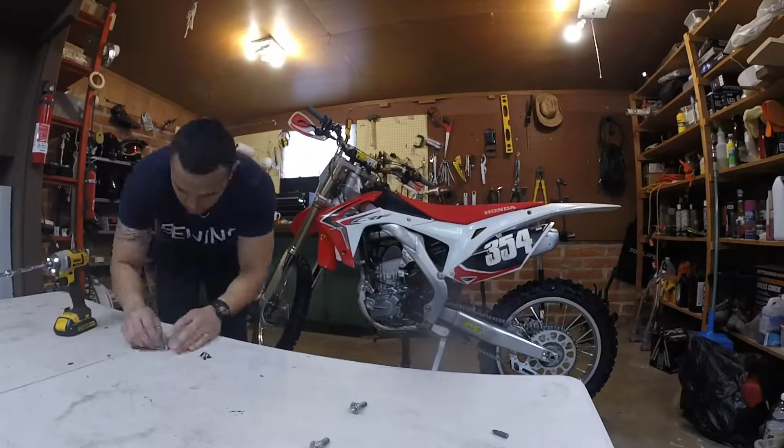Alright, in order to remove the gas tank, you have a cable here that's attached to a hook. You can just unhook it, it comes right off. And then you want to unhook your fuel line, which is this bad boy here. You just got to remove the cover. Comes right off, a little plastic cover.

And then there's a connector here that you just remove. You squeeze, and then you can pull this guy out. You just disconnect, the quick disconnect. The manual says to remove it here. I find it easier to remove there.

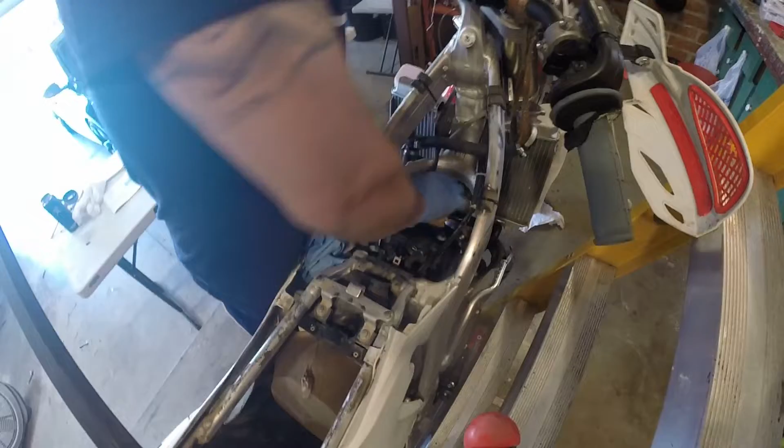And you have your clip, a little clip for the power. You remove it off the frame and then do a quick disconnect as well. So the first thing we're going to do now, we're going to get to our valves. Remove your spark plug cap. Just set it off to the side. Going to remove our breather here and pull that out.

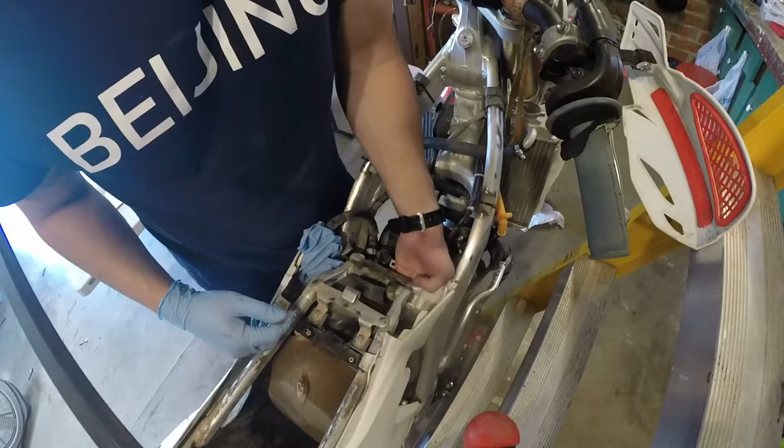There we go. Push that away, and then we'll go ahead and take off our cover screws. Pops right out. It's pretty clean in there. All these are reusable seals. Now we can see our actual head and our valves.

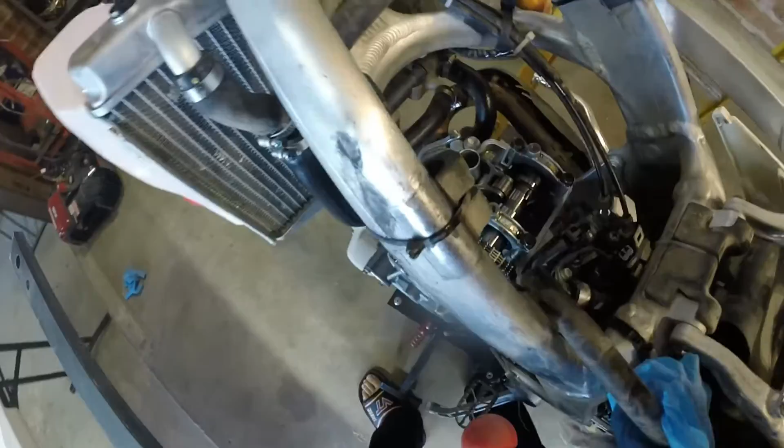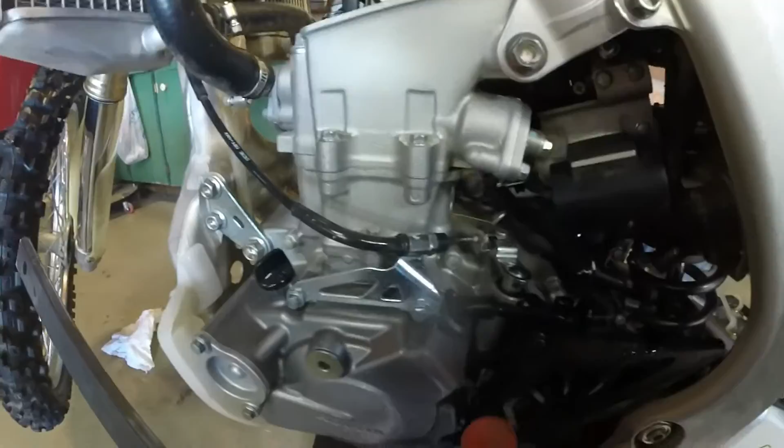You can see your exhaust valves are right here, and the distance we're going to measure is in between this rocker arm and the top of the shim. And the intake valves are underneath the cams. You can't really see them here, but we're going to measure underneath the bottom of the cam and the top

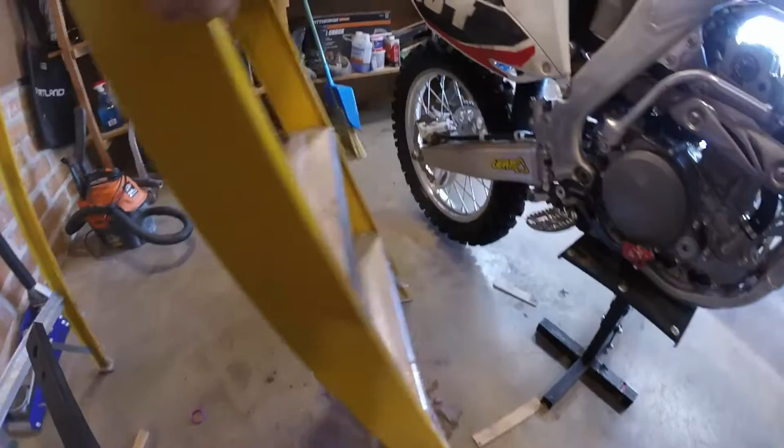of the shims. First, before we do that, we need to put the engine at top dead center, which is TDC, and there's a lot of things you can do to double check that, and we'll go ahead and walk through it. First thing we're going to do is remove our spark plug so we can easily move the piston up and down. You're going to remove this cover here, and I'll show you what's inside.

So once you remove your spark plug and this cover here, you'll see a little dot on that gear, and then you'll see a little tab sticking out of the frame here. You want that dot to line up with the tab. This is an indication that you're at TDC. You only rotate the gear clockwise. You rotate it like this. Your Allen. Make sure your tool's clean. Mine is kind of dirty.

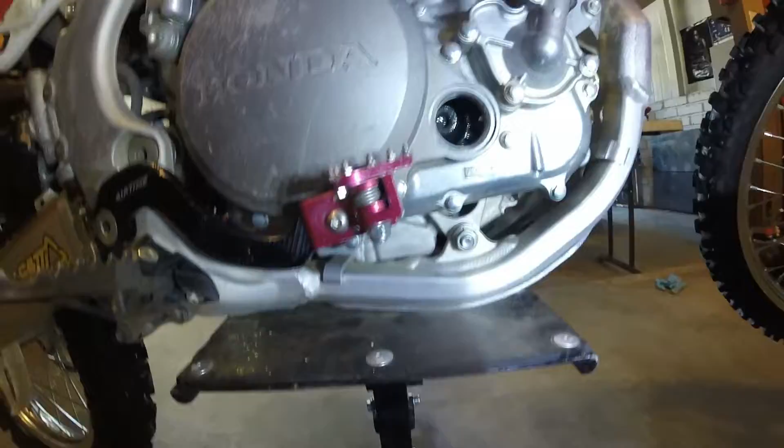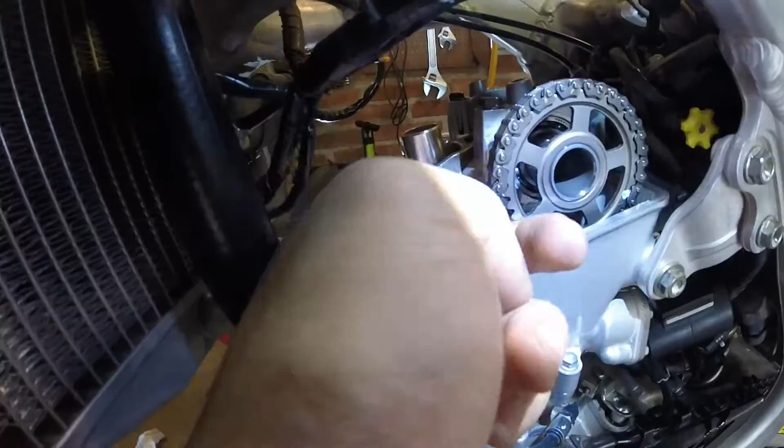And the way to determine that you're at TDC is that your exhaust rocker arms, which are these bad boys, should be loosey-goosey. You can see they move up and down, which means they are not pressing on the valve.

Another indication, you can see your timing chain and your timing gear. There's a line, a groove cut into the gear. That should be horizontal with the top of this head. That's another indication that you're at TDC.

TDC is top dead center, which means you're on your compression stroke. This is where the fuel's already in your cylinder, and your piston's coming up in compression, and all your valves are closed. So you check your valves are closed by feeling your rockers, and you look at your intake valves. You can see the cams.

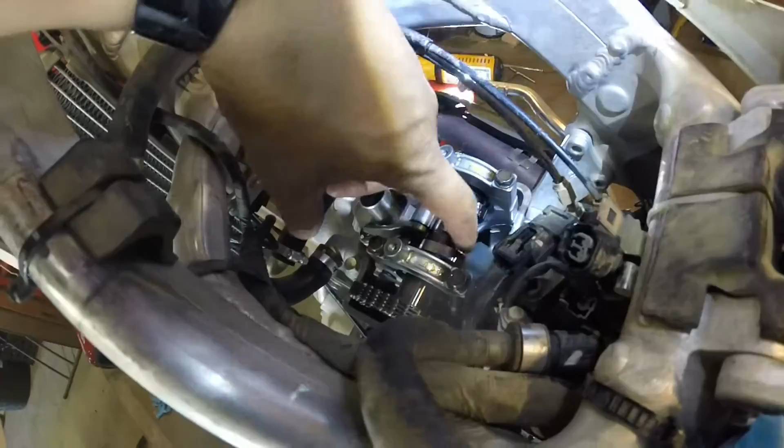These are two cams. These push down on the valves to open them for the intake stroke. You can see how the lobes are pushed up, which means they are not pressing on the valves, which is another indication you're at TDC. You can only take your valve measurement when you're at TDC, so that's why this is important.

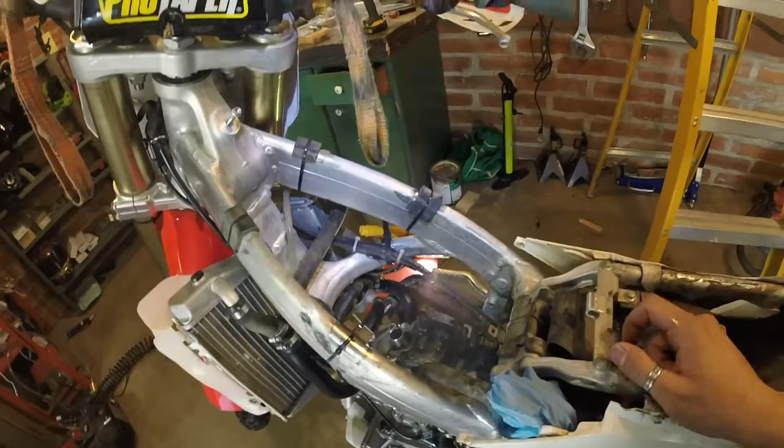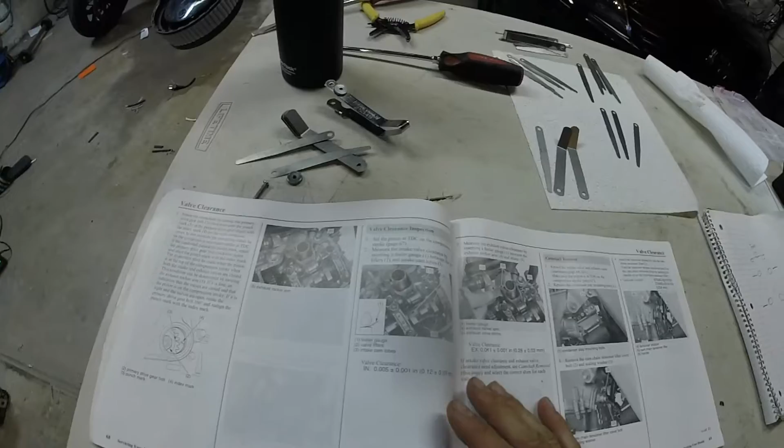Alright, now that our engine is at TDC, we'll go ahead and measure our valve clearance. We'll start with the hardest valves, which are the intake valves. The reason why they're hard is they're just kind of hard to get to. I recommend getting the angled feeler gauges. It'll help you reach inside.

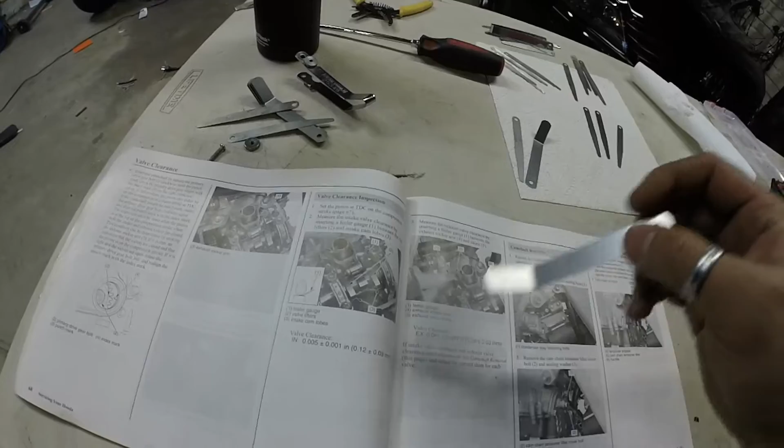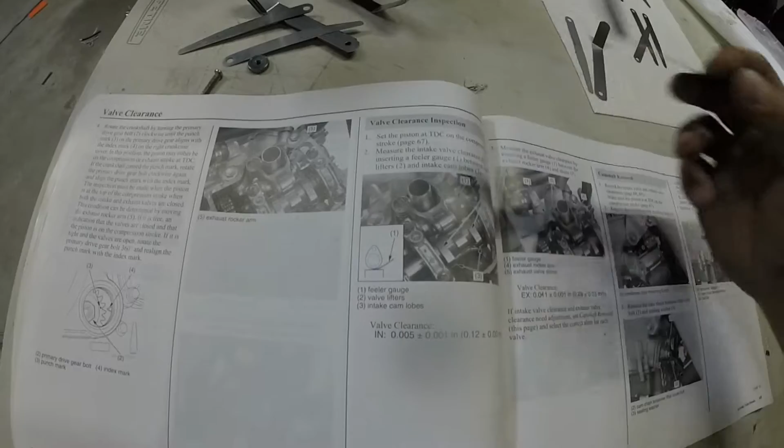You actually need to measure underneath the cam and on top of the valve lifters, also known as the shims. See a little picture here. This is your cam, the side profile. Number 1 is your feeler gauge, and this is where your shims are. There's actually a cover on this one. You measure right in between, and you can see even in the picture they show an angled one. Your tolerance on this is 0.005 inches, plus or minus 0.001.

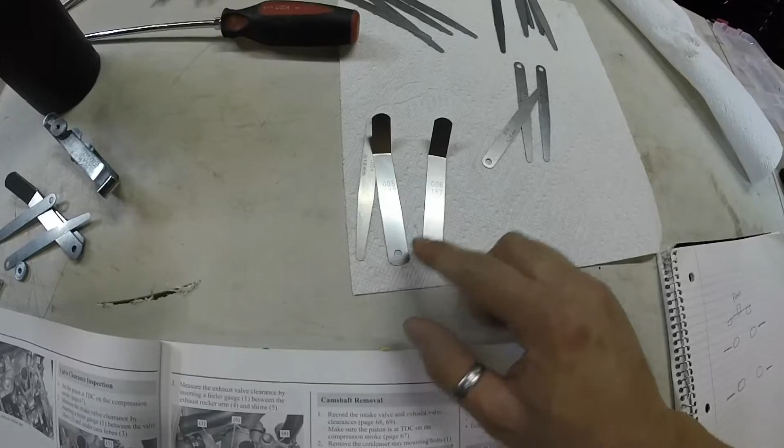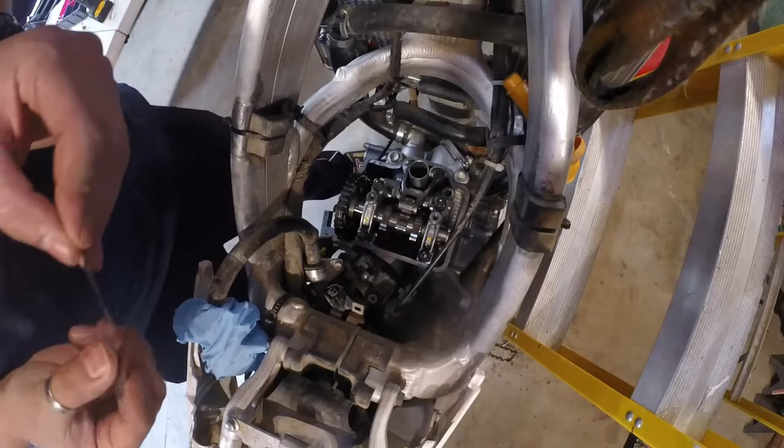So I went ahead and laid out my feeler gauges. They don't make an angled 0.004. I'm aiming for 0.005, so we'll go ahead and start with this one, and then we'll make our way around. Okay, we'll go ahead and measure our intake valves. I'm going to start with 0.005.

Go ahead, and this is our cam here. You have 2 of them. You're going to slide it underneath the cam, and then somehow on top, and it should provide a nice resistance. This one goes in pretty good.

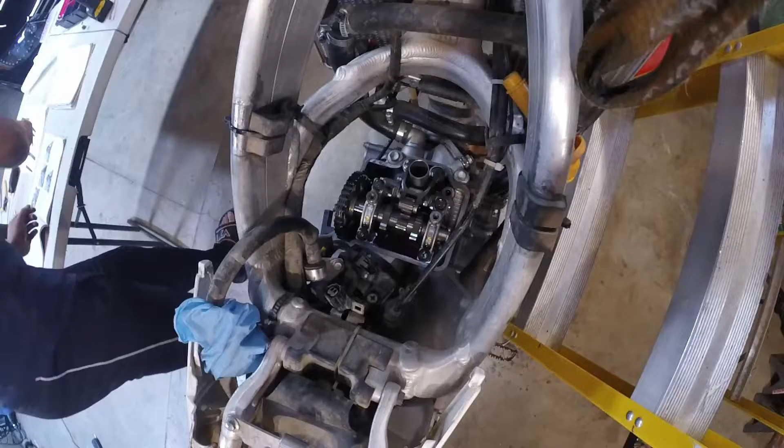Yeah, so this is 0.005, and it does fit in kind of loose, so I'm going to go up one size. 0.006 should not fit. If this is actually 0.005, 0.006 should not fit. So we'll go ahead and try that right now. Go ahead and slide in 0.006. And again, this should not fit.

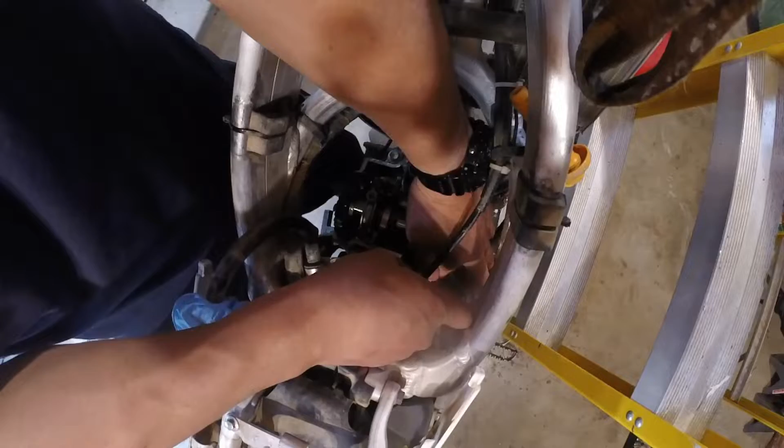Remember, you don't shove it in there. It's just kind of hard to get to. I'm not shoving, but this one doesn't seem to fit, which is good, which means we're in spec for this one. Let me take another measurement. You want to do this several times. Yeah, this one does not fit, so good news on that one. Yep, 0.006 does not fit on the right intake valve. I'll go ahead and write that down.

We'll go ahead and move to the left intake valve, and we're going to start with 0.005. This one's giving me some struggle, so I'm going to try it on this side. Whichever side you think is best. Again, it's pretty difficult to reach in here, but they should slide in pretty easily. This one actually is having trouble sliding in. Like I said, it's slight bit of resistance. This one is not going in. This is 0.005. I'm going to move down to 0.004.

Make sure you wipe your feeler gauges. I don't have an angled feeler gauge here, so you've got to make sure you're inserting it correctly or you get the wrong reading. This seems to slide in pretty good. Remember, 0.004 is still within spec. Slide it in there. You can see it on the other side. Got all these things in the way. But you want to get it in there straight and then move it in and out and feel a tiny bit of resistance. That feels really good. 0.004. I'm going to call this one 0.004.

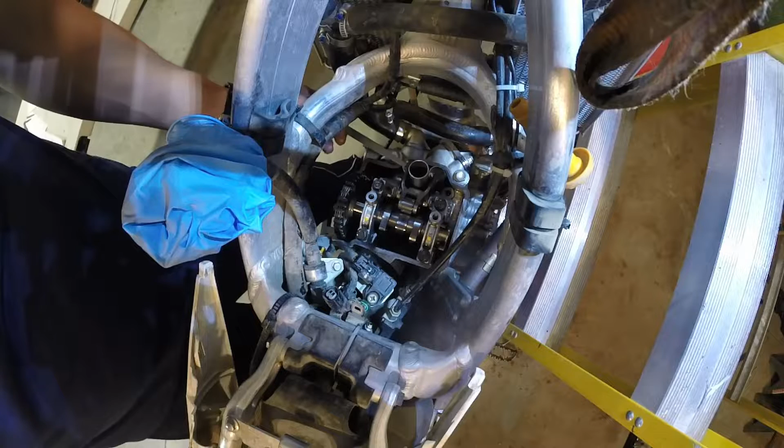Alright, now it's time to measure the exhaust valves. And the tolerance on this is 0.011 plus or minus 0.001. So this is 0.011. This is where I'm going to start. This is probably the easiest one to measure. And you can clearly see your shim and then your rocker arm, which is this guy here. You're going to measure in between that. So we'll go ahead and slide it in, and it doesn't fit. This one is super easy to measure accurately. And you see it doesn't fit. So I'm going to move down 0.001.

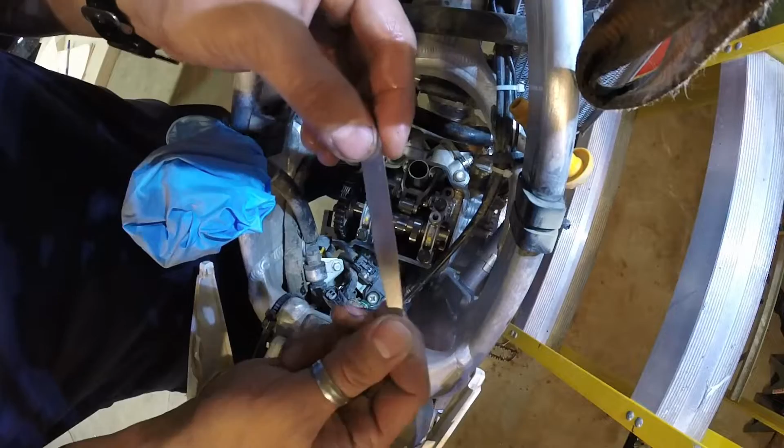Which is 0.010. Now, let's go ahead and feel it. This one does not fit. It does not fit. And this was the bottom end of our acceptable tolerance. So I'm going to go ahead and measure what we have here. This one is going to be out of spec. So I'm going to figure out what it is. So I have 0.009. We need to determine what our clearance is. And holy crap, this one doesn't fit either. Doesn't fit. So this one is pretty darn out of spec.

We're going to go down another thousandth of an inch, 0.008. It looked like it wanted to. It is getting a little too tight. We're going to have to go down another size. It should go all the way through. We're now at 0.007. And this one fits. You kind of feel the resistance. The resistance is similar to putting your feeler gauge inside of a large textbook. You should feel that slight bit of friction. You shouldn't be forcing it, and you can see how easily it slips in. It goes all the way in, and you can kind of move it.

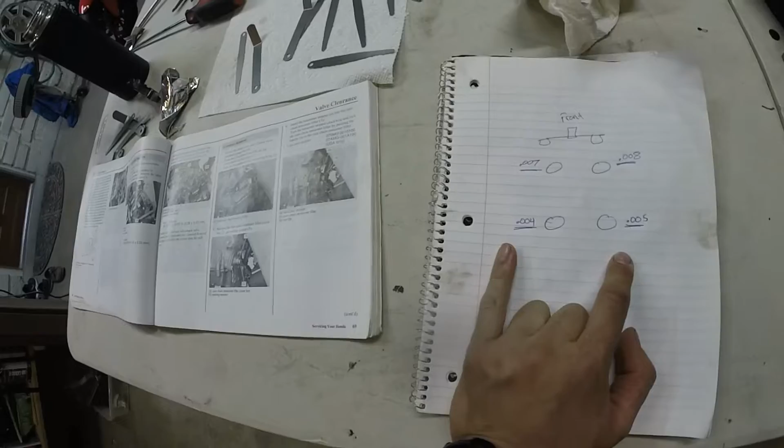Okay, so both of my exhaust shims are out of specification. I wrote it down here. 0.007, 0.008. They're supposed to be 0.011. I'm gonna have to replace those two. My intake, my left one is 0.004, which is still within spec, and my right one is exactly on the money at 0.005.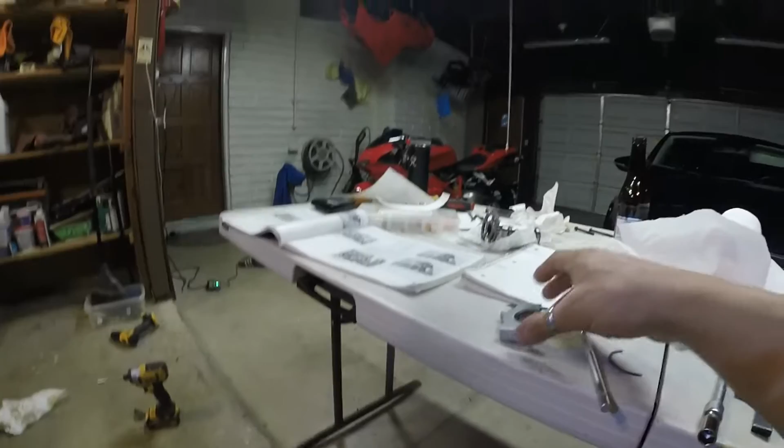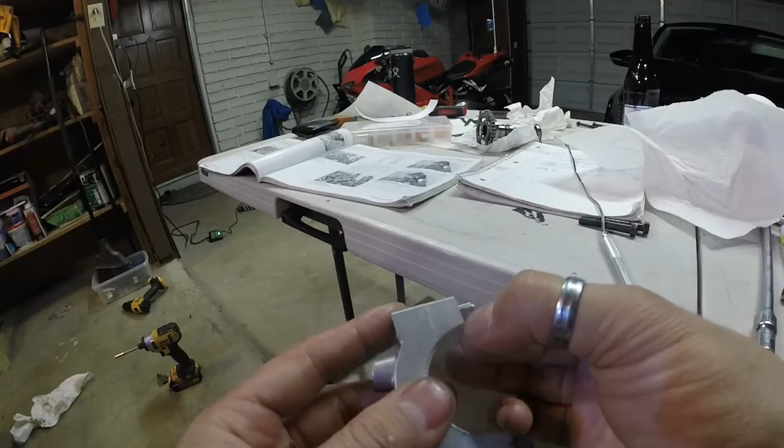Okay guys, I need you to pay attention to this. Don't make a mistake that I almost made. There is a retaining ring that sits inside of your cam journal. That's what I'm going to call it. It falls out. It looks like this. It's on both of them. Don't drop this shit. There you go. These ones are marked. It says left.

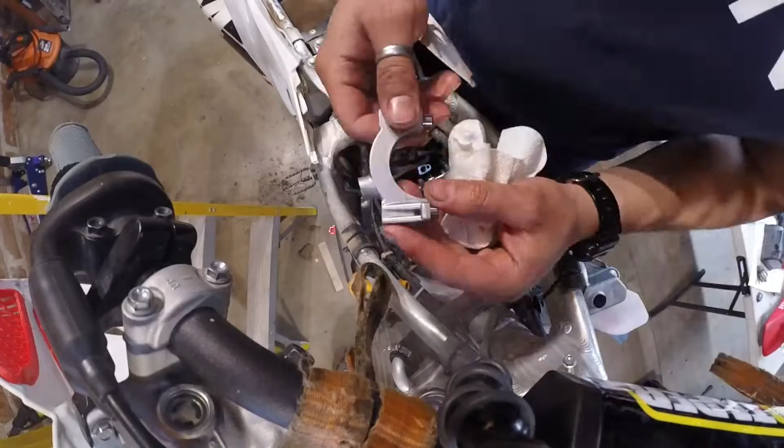There's a bearing here that we can move. You move this bearing over, this one, to the left. Hope you can see this. And then we'll go ahead and hold our cam and we'll slip our chain off by tilting our cam to the left. Bada bing, bada boom. Cam's off. You can see I'm still holding onto my chain because if I drop it, there goes your chain. So we'll go ahead and put a screwdriver here, nice and long one. Set the chain on it, it's not going anywhere.

And you can notice all the holes everywhere that go straight to the bottom end. I don't really feel like getting anything from down there, so get some shop towels and shove them in here. And hopefully, with your slippery fingers, if you do drop something, it doesn't go anywhere. This goes right here. And I forgot to do this earlier, but go ahead and cover up your spark plug hole for the same exact reason. Alright.

And you just lift your exhaust rocker up and you can get a little magnet. Pull your shim out of there. This is what the shim looks like. It's kind of like a tiny battery. I don't see any markings on it, but you need to remember, you need to mark which one you took this off. So take it off one at a time. This is my left exhaust. I need to make sure I remember it's my left exhaust. Just like the left one, we remove our right one with a magnet. Oh, there we go.

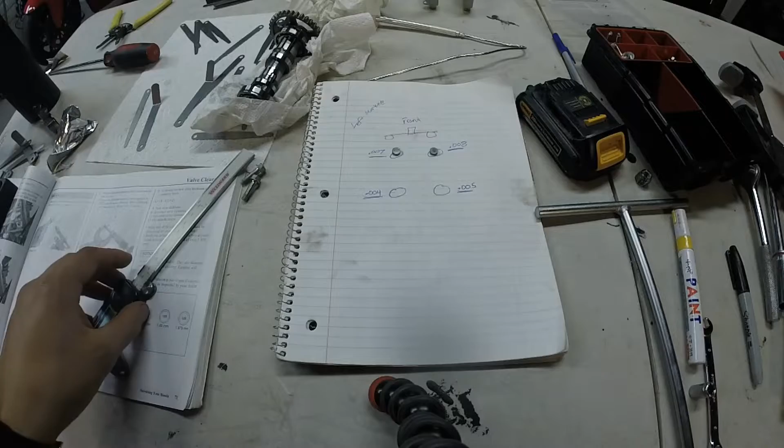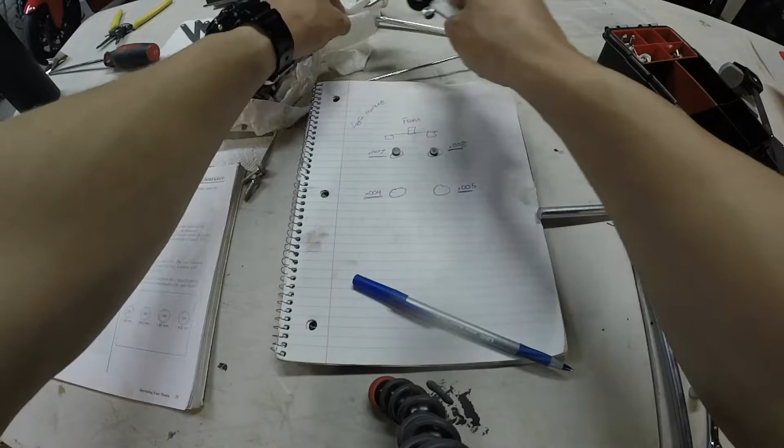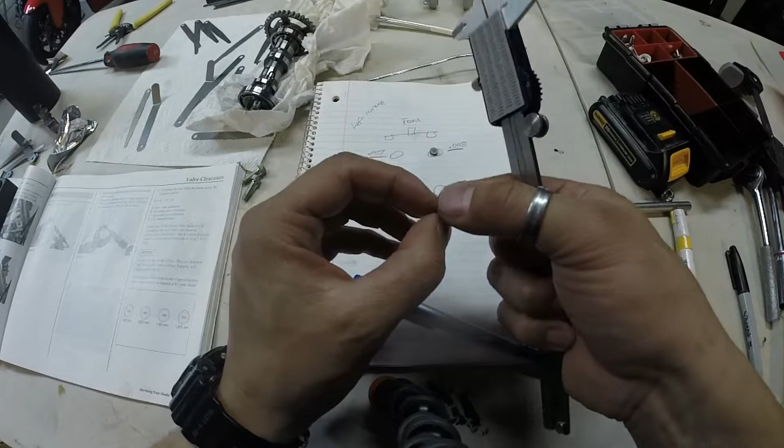Alright guys, we are at our final step. Man, this was so much easier than my Ducati. It's incredible. So we have a vernier caliper right here. This one's up to accuracy of 0.001, which is what we want. We're going to go ahead and measure the thickness of our shims that we just removed. I'm going to clean these guys off. This is my left one. Go ahead and measure this guy. Shouldn't be biting down too hard. I like to open it up and close it back down until I get the same number.

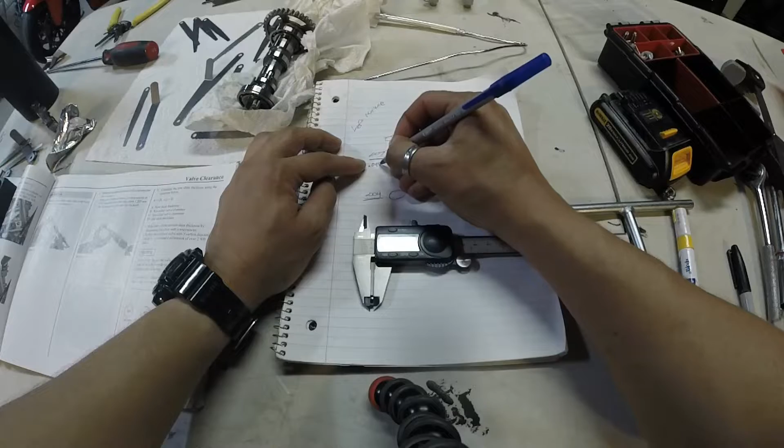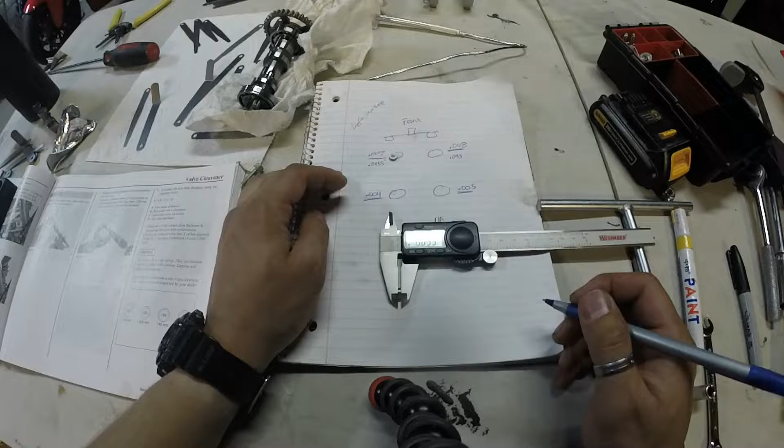This is what I measured for the clearance, and this number here, 0.0955 in inches, is my shim size. 0.0955. One off. Make sure our caliper is zeroed out. Perfect. I'm going to go ahead and measure this several times. And it might be the exact same shim. Okay. Very, very close. Size of shim is 0.095. Yeah. They're the same shim, but just one shim wore out more than the other.

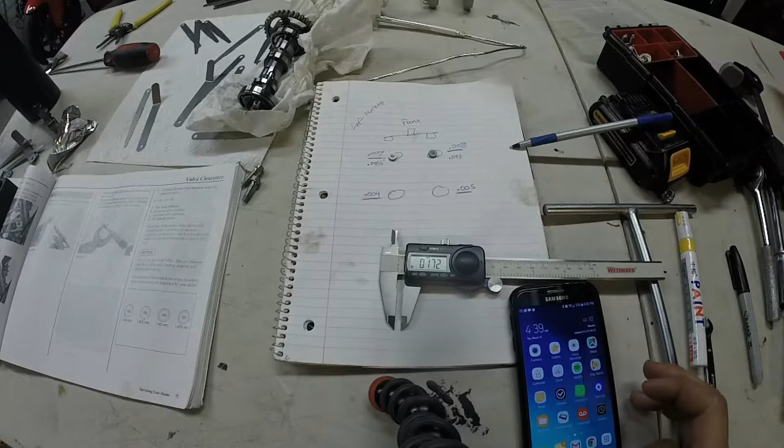Now we'll do our calculation for our new shim size. And this one is pretty straightforward. Gonna go ahead and open your parentheses. You're gonna put in your recorded valve clearance. We'll start on this left one. And this is my recorded, this is what I measured with my feeler gauge. Recorded valve clearance. It's going to be 0.007. You see that there? I'm going to go ahead and subtract my specified valve clearance.

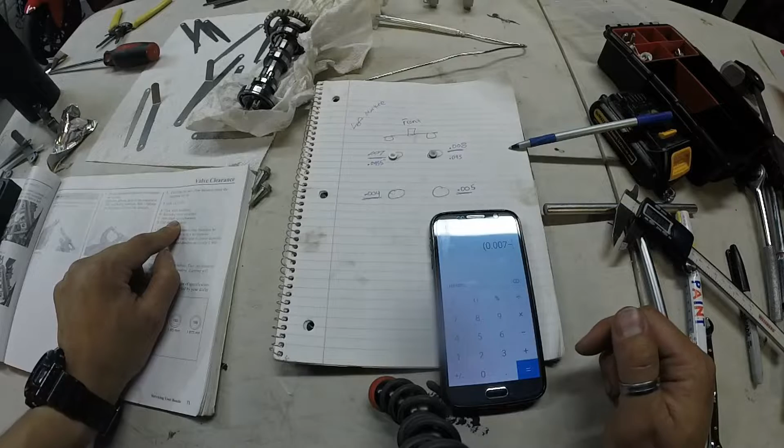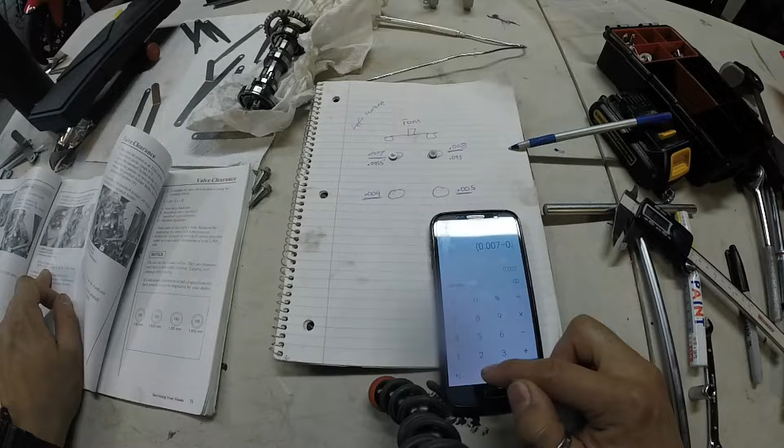And this is what Honda specifies. So for the exhaust, I'm going to go ahead and look it up in the book. The exhaust specified is 0.011. We're going to go ahead and close the parentheses. And we're going to add our actual shim size, what this shim size actually is, which is 0.0955. We go ahead and equals, our new shim size will be 0.0915.

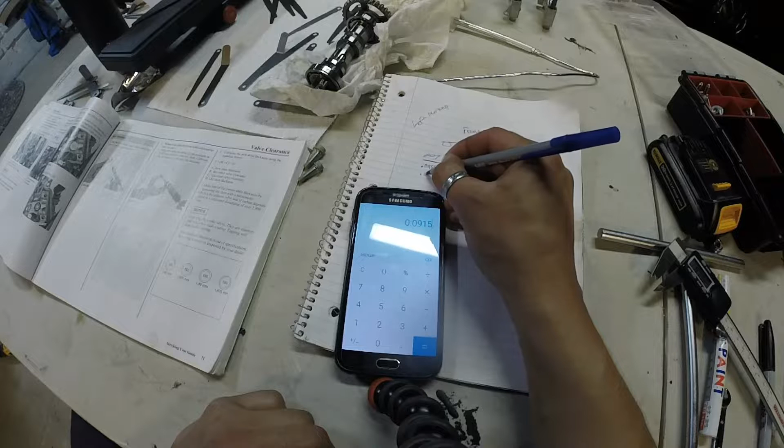0.0915. This is going to be our new shim that we're going to buy, to get us at exactly 0.011. So we're almost done.

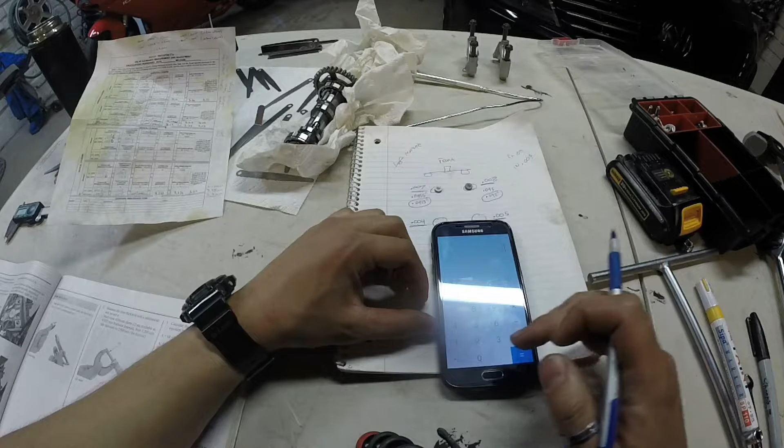It's almost time to buy new shims. First thing I forgot to mention was you need to convert your inches into millimeters because your shims come in millimeters. I like to measure in inches, easier numbers to understand. But this was our calculation we just did, 0.0915. That is in inches. In order to convert to millimeters, you simply multiply by 25.4.

So we'll go ahead and do the equal sign. In millimeters, our new shim size is 2.324 millimeters. There it is, the big number.

You need to show up to 1/1000th of a millimeter because Honda makes their shims in intervals of 0.025. So you want to make sure you have 3 decimal places after that. You don't need to round. We're not going to round here.

My calculation was 2.3241. I'm going to write down 2.324. I'm going to find the closest shim size to that. I think the closest shim size is going to be 2.325. And that should work.

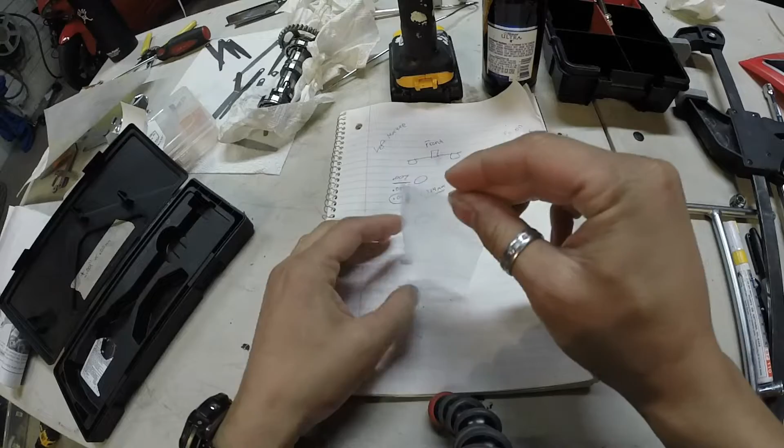Alright guys, so I just picked up my new shims from the local Honda dealer. And thank goodness, miraculously, they had the right sizes.

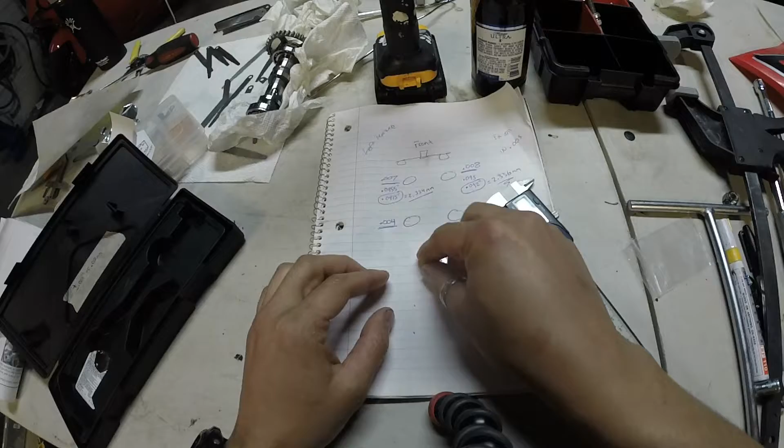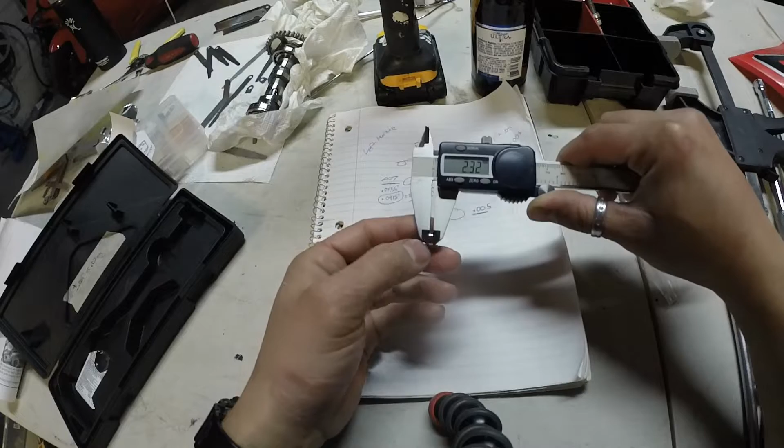You need to make sure you bring a micrometer or measure your shims over there because these readings don't mean much really, it's like an estimate, I'm assuming. I don't know what it is, but this says 2.35. That's what that value should be, right? I measure it, it's 2.32. So I don't know what that number means, but from the manual it looks like it's supposed to be 2.35. Yeah, but it's not.

This one says 2.38. From the manual, that means it's 2.375, right? It's an abbreviation for another number, which is stupid, but I measure 2.35, right? I'm going to convert that to inches. 0.0925. That's exactly what I need.

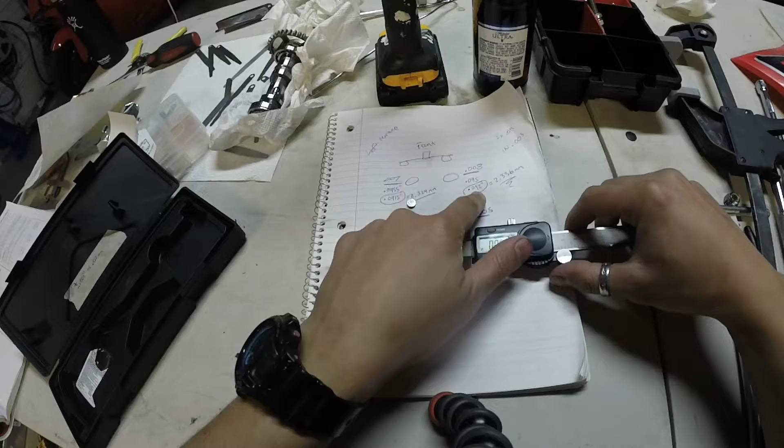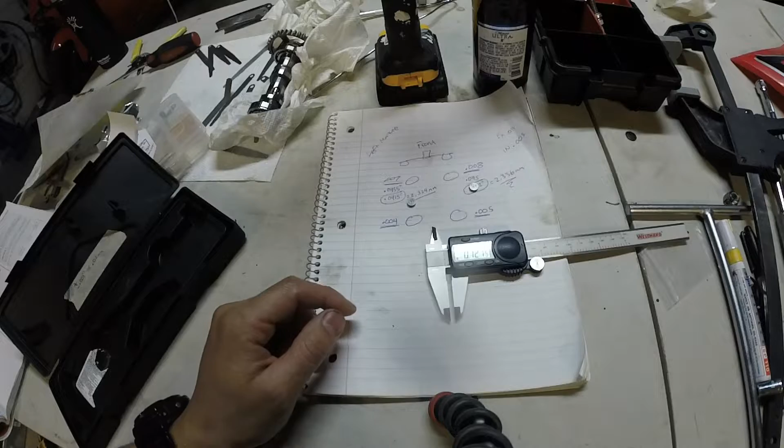So they may say, 'Oh, we don't have your shim size.' Get your vernier caliper and measure your shims before you get disappointed and have to order stuff. But bada bing, bada boom, time to install the shims.

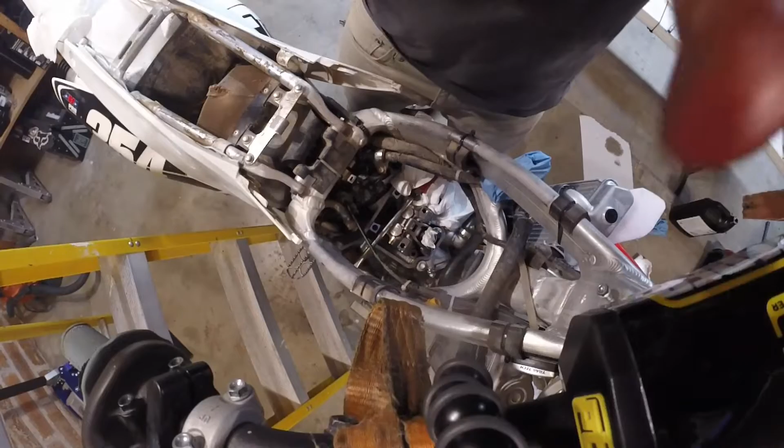Alright, guys. So I showed you how to replace the shims for the exhaust, which are super easy. The intake is the same way, except you just have a cover. This is your little cover, and right underneath it is your shim, and it's the same shim that goes into your exhaust. Remove that shim with the same tool, and bada bing, bada boom. Make sure you know which one's on the right side, which side's on the left side. It's the same thing, very simple.

You're supposed to do this every 15 hours. If you ride a lot, you'll be a pro in no time.

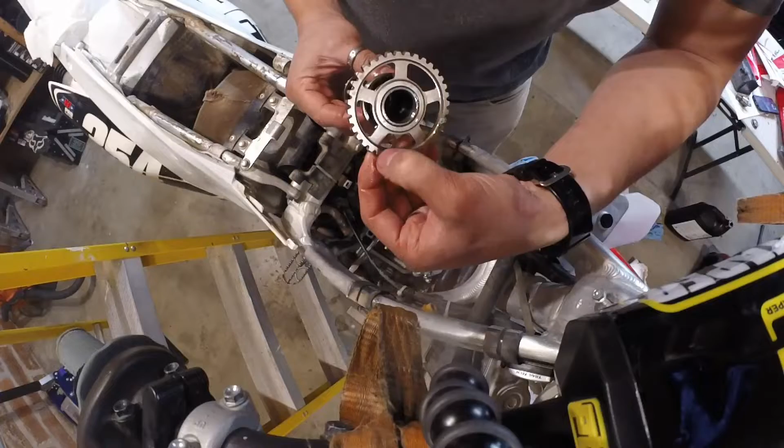Alright, now it's time to install our cams. This is our little bearing that we slide in and out, this guy here. You slide it to the left to remove it. We're going to do the same thing to put it back on. It goes like this. There are markings, right? There's a little line here. That needs to be in line with the head. I mentioned that before. I'm going to go ahead and drop this bad boy in.

First, you got to grab your chain. Be careful when you're moving around your chain. Don't drop it, don't rotate it. You'll move your piston and you'll have to reset. You got to make sure you're at TDC. Don't spin your motor at all when you're doing this, and then you don't have to worry about it. You just set it once. Go ahead and drop our cam in, not literally.

And we will go ahead and put our chain on. There we go, and we're in place. Put your bearing back where it's supposed to be. You push your bearings inwards and they stop, and I'm assuming that's where it's supposed to go.

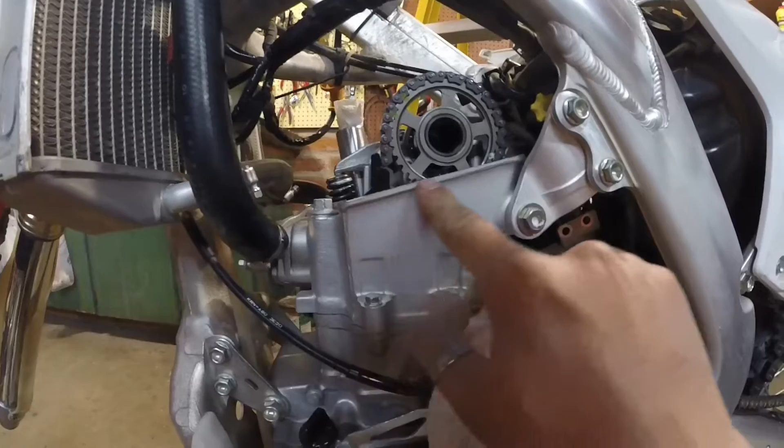Alright, now the cam's installed, your chain's in place, you line up your marks that you made previously. You see that line that I pointed out before that's on the gear? That line is horizontal with the head. This is the head, this line should be perfectly parallel. Should be perfectly parallel with that line. So you can kind of see it's perfectly in line with that line. That's how you know it's lined up, that's how you know your cam is lined up correctly.

Alright, so we're just going to add some oil to the tops of our cams and our bearings, just so on initial startup, it has oil.

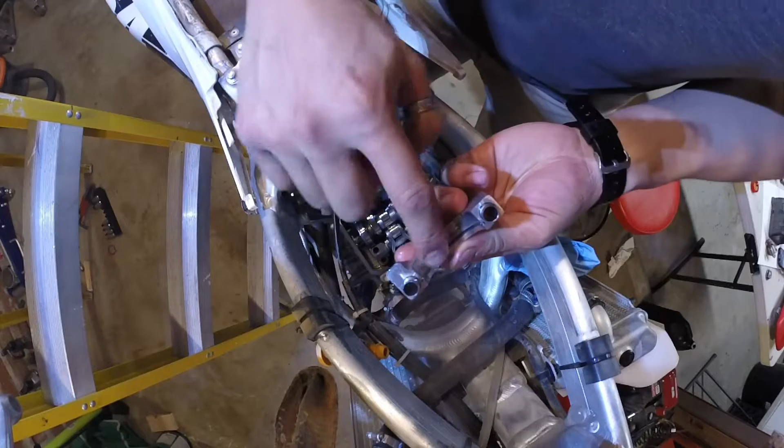Add some oil to the back of our cam holder. Remember that retaining ring is loosey-goosey and it's very easy to drop in, so be very careful when putting this on.

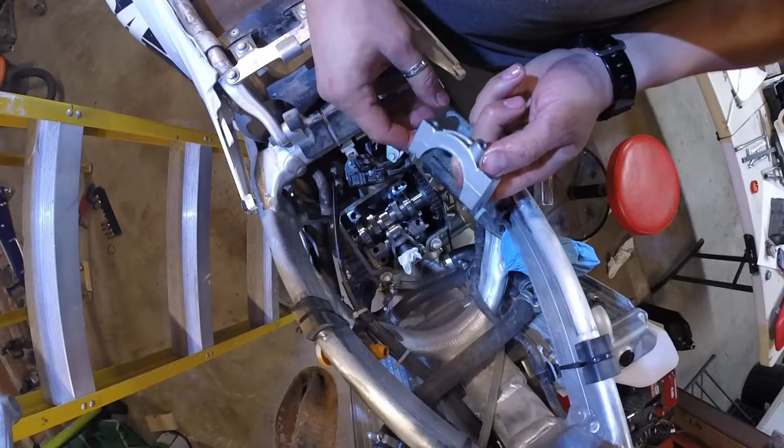R stands for right side. This arrow points to the back of the bike, I'm assuming. That little retainer is going to go inside of the bearing groove. I like to squeeze my bearings in so they're fully on the cam. We're going to go ahead and set this in.

Remember, be very careful, this is the hole of doom. If you drop your retainer in there, you're pretty screwed. So we're going to set this in. I'm going to visualize and make sure that that retainer sits on that bearing.

Now you're going to add oil to the threads, to the threads of your screws as well as to the mating surface. Remember, the long screws go up front, short ones go in the back.

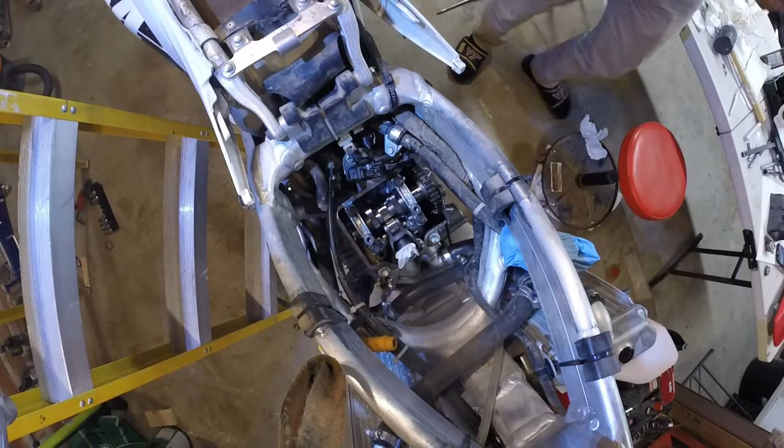Go ahead and start screwing them in. Try to screw them in easily, and then we're going to torque them down in a crisscross pattern. So I'll go ahead and seat these. These only get torqued to 12 foot-pounds, so I'm going to seat these very lightly.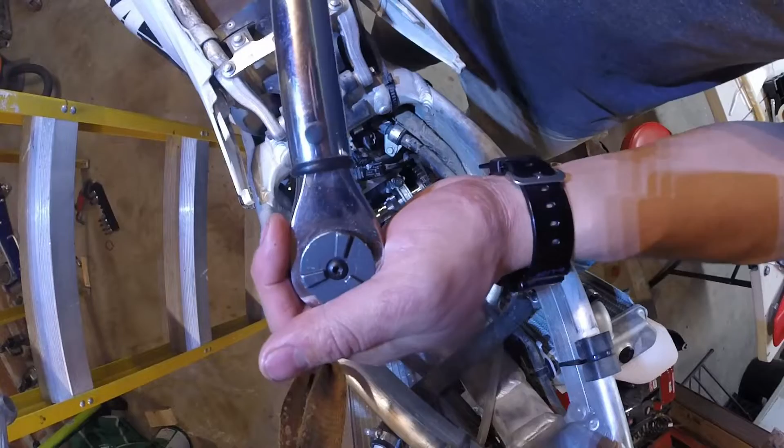Alright, now it's time to torque down these bolts. It's 12 foot-pounds. You want to do it in a crisscross pattern, in 2 to 3 steps or stages. So I'm going to do half turn, half turn, doesn't matter, half turn, half turn - that's one stage. Another half turn, another half turn. Continue doing half turns or quarter turns, whatever this is.

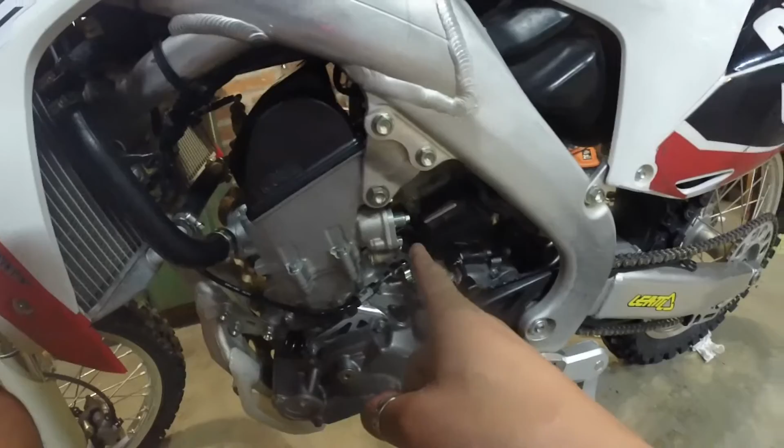Just a side note, when you install the tensioner, if you don't have the tensioning tool, you can do this without it. For this installation, we had this thing fully removed. When it's removed, that spring automatically pushes out the plunger at maximum tension. You don't want to just reinstall it like that, because you're going to put too much force on your cam tensioning chain, and you're going to get a really loud whining noise. A lot of people make this mistake, putting too much tension. This is an automatic cam chain tensioner, and it adjusts automatically as the chain loses slack - it automatically pushes out, it's just a spring plunger. So what you need to do...

This will be removed, and then this screw will be removed as well. You're going to get a flathead screwdriver - I don't have one small enough, so I use this watermelon knife. You just turn the flathead to the right, clockwise, and then you'll see the plunger start to get sucked in. This removes the tension off of the cam chain.

So what I did is, this was off. I turned it all the way to the right until you couldn't anymore, so there was no tension on the cam tensioner. I then put it in, put the screw in all the way down, and slowly released this tool, and the plunger slowly pressed on it and automatically set where it's supposed to be. I put in my second screw. There's no torque setting, so just hand tight, and you put in this cap, this last screw, and that's it.

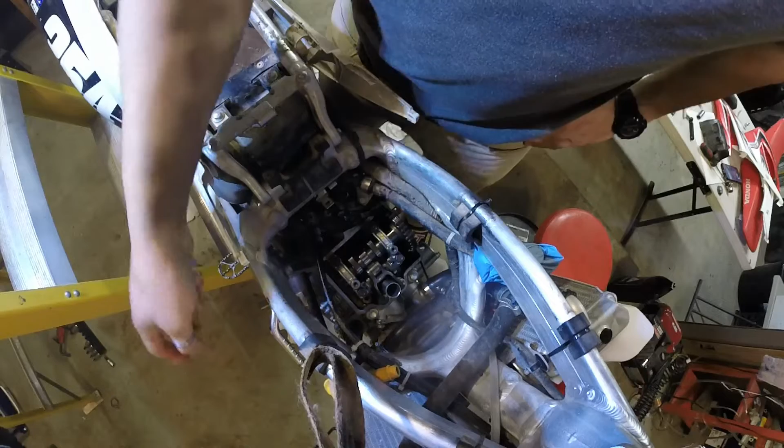Alright, so rotate your motor a few times with the 8mm Allen on the side. Make sure nothing's binding, everything sounds good, and then put everything back to TDC. Line up that dot with the groove in the hole like I showed you before, and we're going to go ahead and take measurements again.

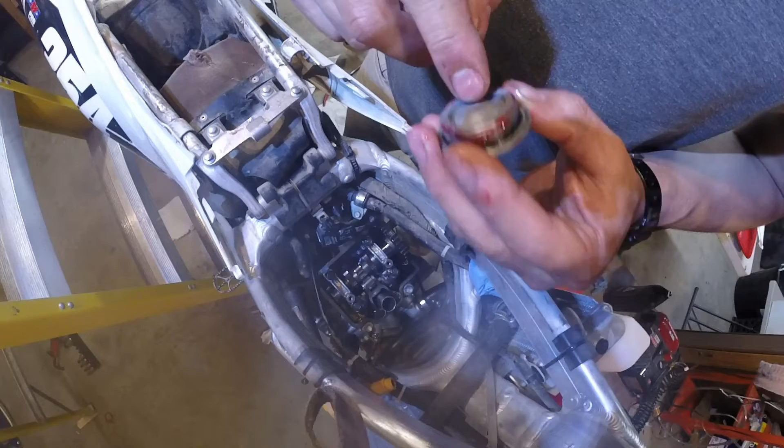So you're going to go ahead and install your spark plug. If you're reusing the same spark plug, once it seats by hand, you turn it 1/8 of a turn, and you're good. If it's a new spark plug, once it seats by hand, you turn it a whole half turn, turn it back, seat it again, and turn it an 1/8 turn. You've got to make sure you do that correctly, or you're not going to have a correctly seated spark plug - it may come loose. Then for your cover on the right side of the bike, engine oil on the seal, grease on the threads. You torque this down to 11 foot-pounds.

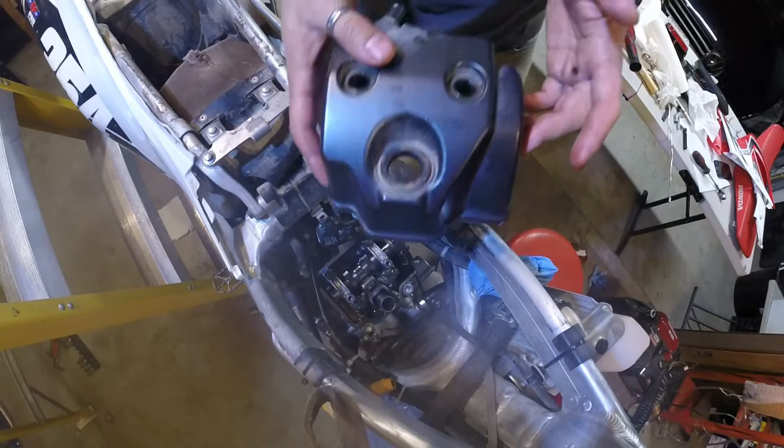Alright, now it's time to install the cylinder head cover. Make sure your seals are faced up - there's a letter that says up. We didn't remove those, so it's not a big deal. You need to apply oil to your spark plug hole packing. We're just going to put in engine oil, just like that. And all you got to do is drop this bad boy down.

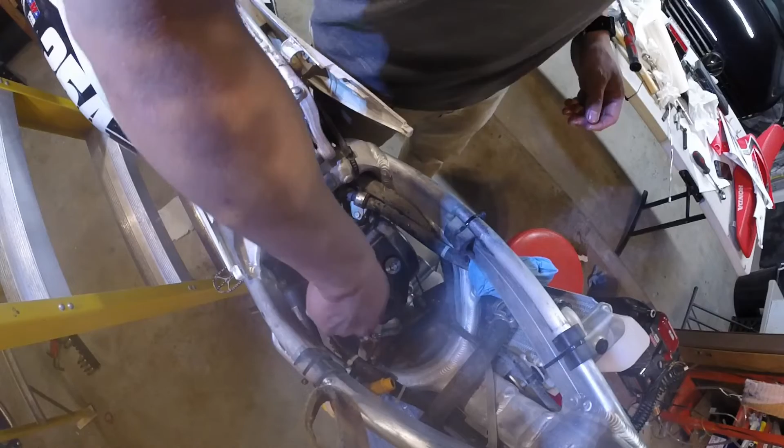We're going to go ahead and put our bolts in. Those get torqued down. These get torqued down to 7 foot-pounds.